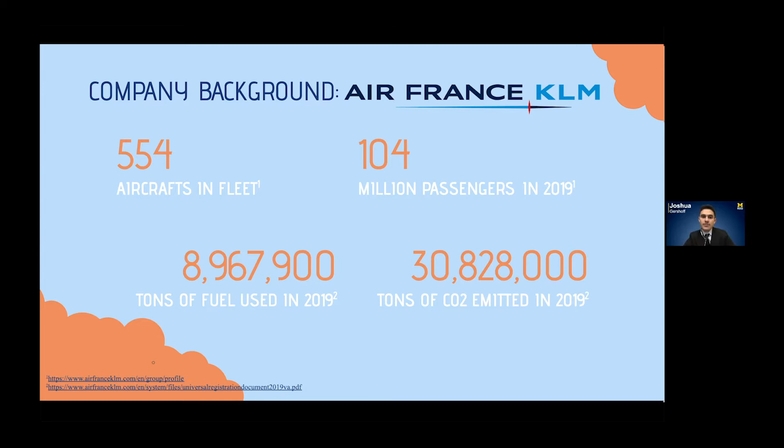With an industry-wide average fleet size of around 400, Air France-KLM is a moderately large airline with 554 aircraft in its fleet. They had 104 million passengers, used about 9 million tons of jet fuel, and emitted about 31 million tons of carbon dioxide in 2019.

Lufthansa, on the other hand, is a slightly larger airline with a fleet of 763 aircraft. They had 145.2 million passengers, used about 11.5 million tons of jet fuel, and emitted about 36 million tons of carbon dioxide in 2019.

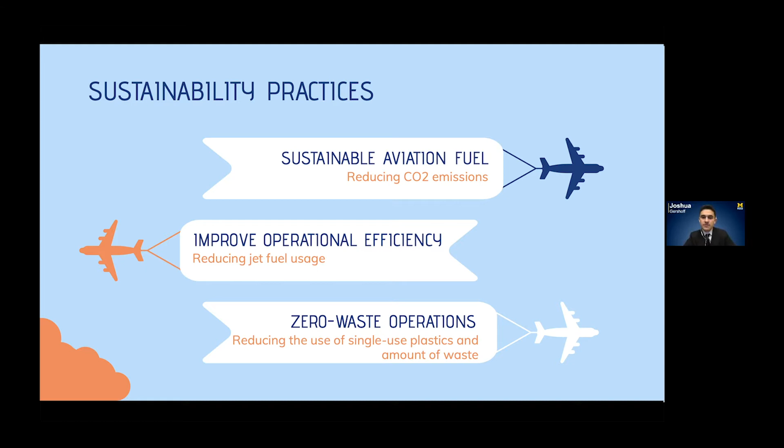Sustainable aviation fuel is an alternative jet fuel source and a substitute for fossil jet fuels. The fuel is made from sustainable resources like waste oils and non-fossil CO2, rather than being refined from petroleum. The overall benefit is that SAF can produce an 80% decrease in CO2 emissions.

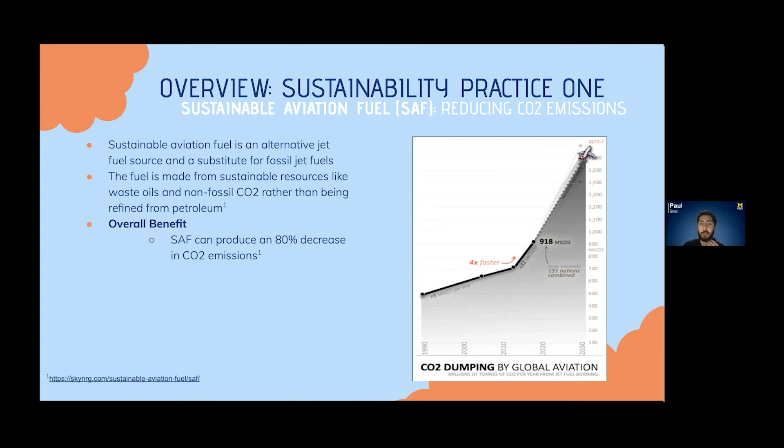As of this moment, Air France has been at the top when it comes to using SAF. According to Argus Media, they have been purchasing 120,000 liters of it annually. They have taken steps to partner with fuel companies to have access to SAF, and they have implemented a biofuel program to ensure they are not incurring all costs related to using SAF.

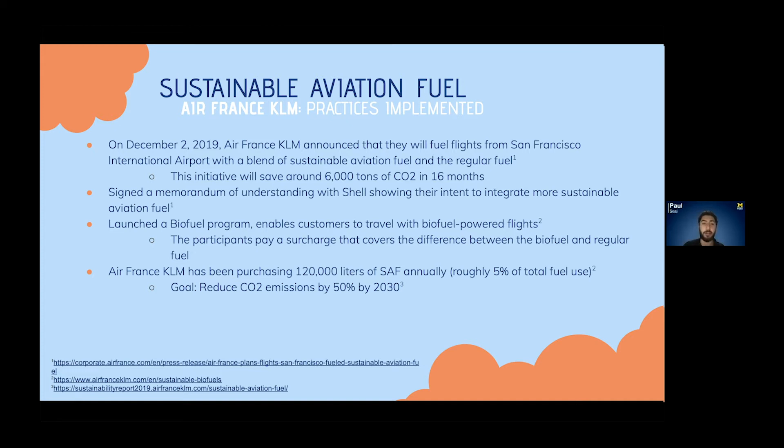When it comes down to being environmentally conscious, we believe it is important to be able to measure productivity. Air France has been transparent with their usage, partnerships, and estimated future usages, so from an investor standpoint, it will be easy to measure their effect on the environment. It also helps to ensure this is not a PR stunt.

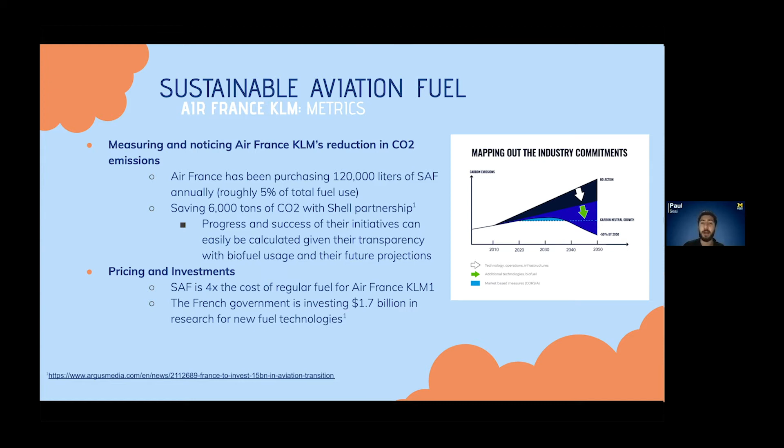The pricing aspect can prove to be detrimental if not implemented the right way. As of now, SAF is 4 times more expensive than regular fuel for Air France, according to Argus Media. On a positive note, the French government is investing $1.7 billion to SAF research.

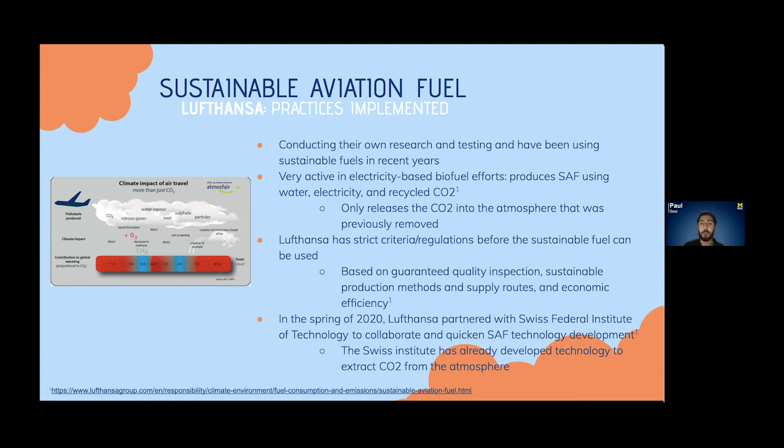Besides using traditional SAF, Lufthansa Group has been heavily involved in research and development for sustainable fuels. They are specifically involved in creating an electricity-based biofuel using water, electricity, and recycled CO2. This technology will not release any new CO2, it only releases what is extracted from the atmosphere, which allows for net zero emissions while using that fuel.

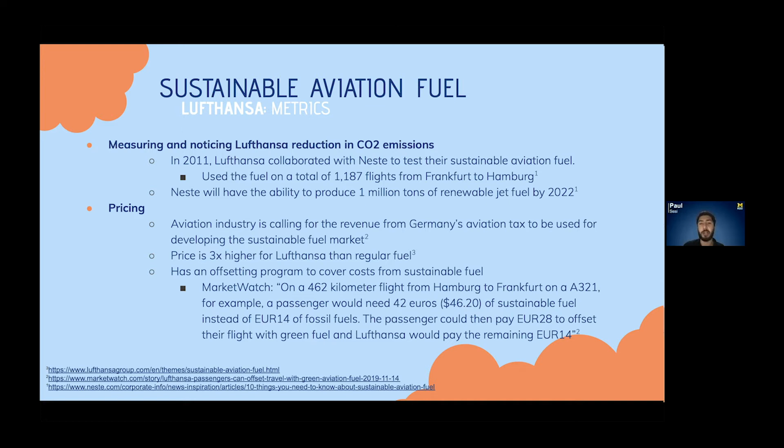Lufthansa has partnered with Neste, which gives them direct access to Neste's estimated 1 million tons of renewable fuel. They also have an offsetting program where customers pay around 50% of the surcharge for flights using SAF. When it comes to pricing, it is 3 times more expensive than regular jet fuel, but it is likely that the German government will use aviation money to cover the cost of the sustainable practice.

Now let's look at comparison. As of now, Air France is outperforming Lufthansa when it comes to usage. However, Lufthansa's research and development team is promising technology that would outperform Air France, given that the market is still extremely small. Lufthansa's partnership with Neste also has more potential than Air France with Shell because of their production capabilities.

When examining their cons, the cost of SAF is more expensive for Air France-KLM. For Lufthansa, their new technology is still a few years out, but Air France-KLM is able to use SAF now.

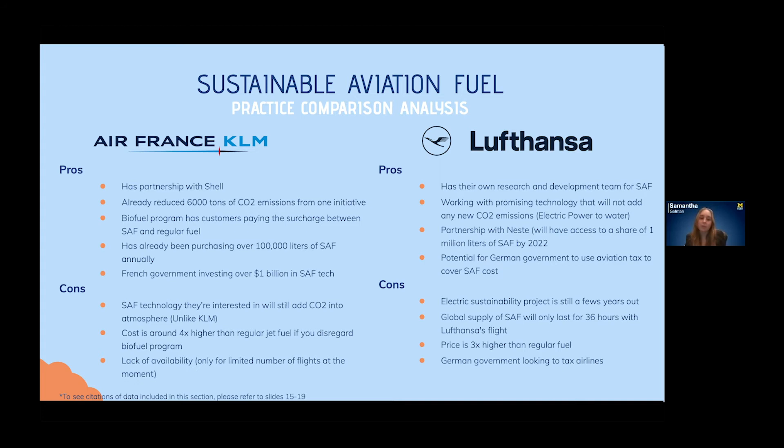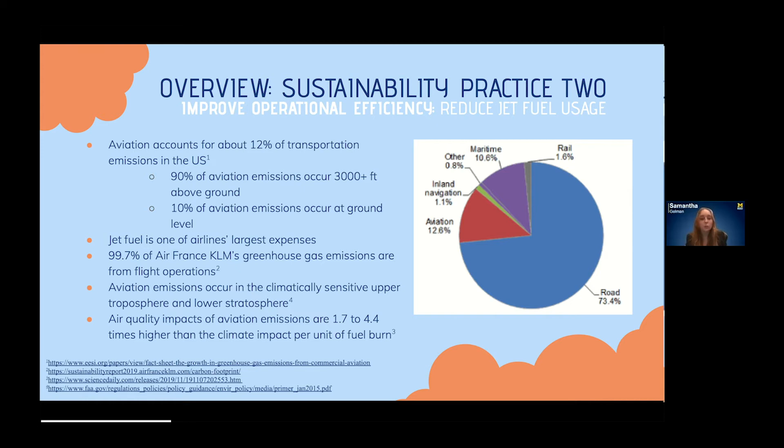The next sustainability practice we're examining is operational efficiency. Improving operational efficiency can reduce jet fuel consumption, thus reducing greenhouse gas emissions. As jet fuel is one of airlines' most significant costs, improving operational efficiency can also lower their expenses.

Air France-KLM has been implementing many new policies to increase operational efficiency and thus decrease jet fuel usage. For example, because lighter aircraft use less fuel, Air France-KLM has implemented weight reduction measures on board. To reduce the weight of the aircraft even further, they have also been reducing the extra fuel carried per flight.

Air France-KLM has also been trying to increase operational efficiency and sustainability by optimizing flight operations. They have recently begun using OptiClimb and OptiDirect in their aircraft, both aiming to reduce jet fuel consumption. Furthermore, Air France-KLM has made a conscious effort to modernize its fleet and replace older aircraft with more fuel-efficient models.

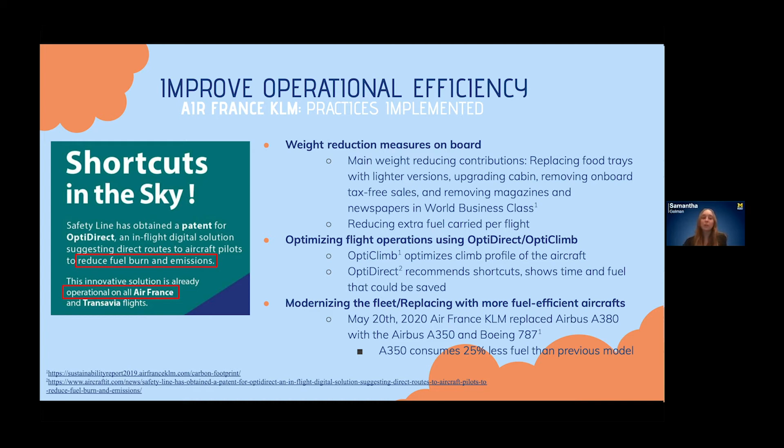On May 20th, 2020, Air France-KLM ended Airbus A380 operations and replaced it with the more fuel-efficient Airbus A350 and Boeing 787. Air France-KLM has been tracking the impact of their policies through tracking their jet fuel usage.

They made it a goal to reduce fuel usage by 4 million liters in 2019, and through these policies, Air France-KLM was able to exceed this goal and reduce total fuel consumption by 4.3 million liters.

In addition to tracking environmental impact, Air France-KLM tracked how these sustainability improvements impacted their expenses. According to their financial statements, despite the decreased jet fuel consumption, an increase in jet fuel price caused Air France-KLM profit to decrease by $320.3 million in 2019.

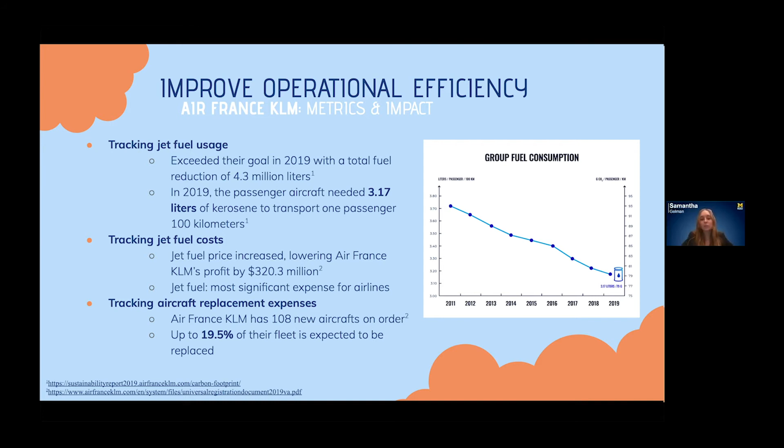According to Air France-KLM's universal registration document, they currently have 108 new, more fuel-efficient aircraft on order. From these new sustainability policies, in the future, Air France-KLM's expenses will decrease along with jet fuel consumption.

Lufthansa, on the other hand, partnered with both Google Cloud and Honeywell Aviaso, leaders in the software industry, to increase their fuel efficiency. They've also invested in a lot of new fuel-efficient aircraft. In 2019 alone, they got 27 new aircraft that emit 25% less emissions. Retiring their inefficient aircraft that these replace also helps a lot with increasing their fuel efficiency on average.

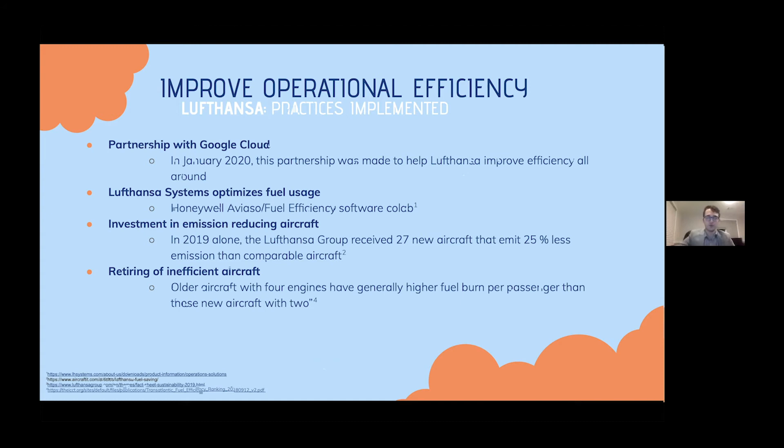So more statistics on Lufthansa: they have 198 new aircraft on order with delivery dates up to 2027. With a current fleet of 763, this represents 30% of their entire fleet.

In terms of their fuel consumption efficiency, in 2019 their efficiency was 3.67 liters of kerosene to transport one passenger over a distance of 100 kilometers. They've increased this fuel efficiency by 30% since 1994 and have proven to take a lot of care on this matter.

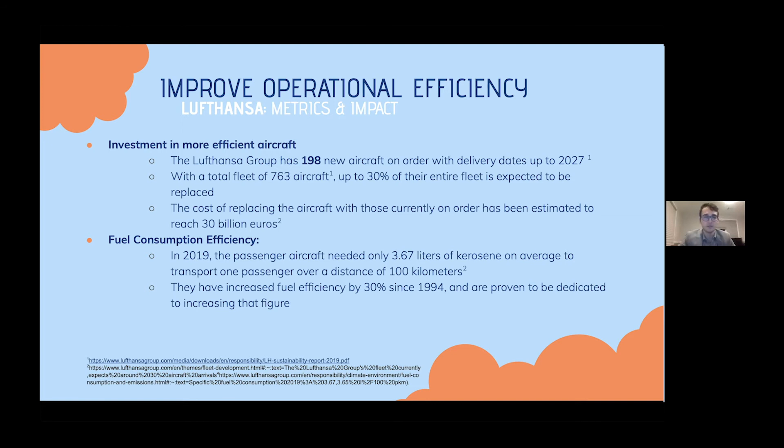Now, if you look at the graph on the left, this was a calculated average in 2017 of airlines' fuel efficiency. The graph on the right shows that 80% of the key metrics behind this fuel efficiency rating come from seating density and aircraft fuel burn rate. These have both increased significantly in modern aircraft, reducing operating costs and creating additional synergies.

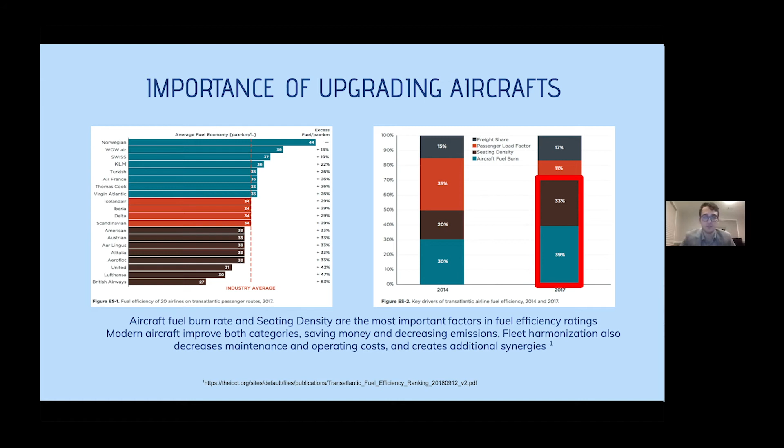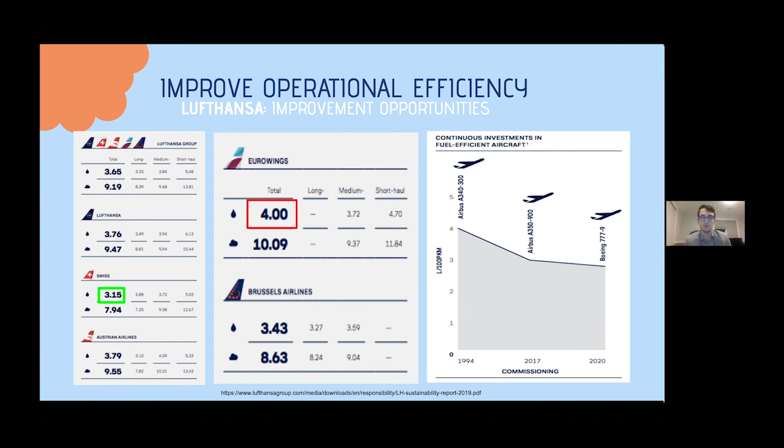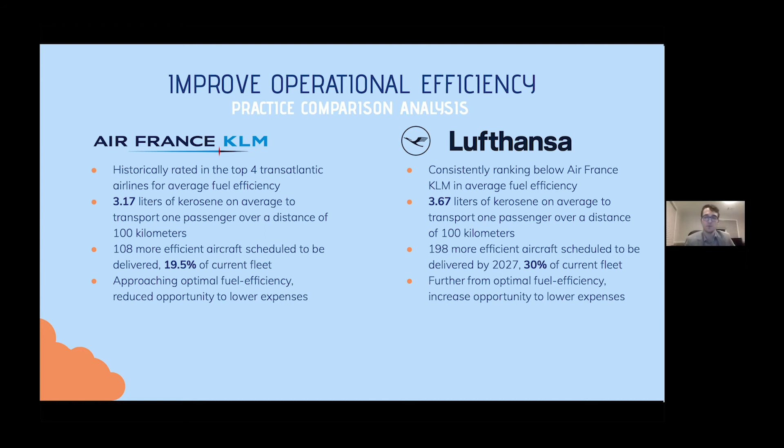When it comes to comparing the two, Air France-KLM has been historically rated in the top 4 with 3.17 liters of kerosene on average. However, Lufthansa has 198 more efficient aircraft scheduled to be delivered, representing 30% of their current fleet, as opposed to Air France-KLM's 19.5%. This means there's a lot more room for Lufthansa to expand and lower their expenses.

Next I'm going to talk about the third and final sustainability practice, which is the reduction of single-use plastics in order to create a zero-waste environment on board.

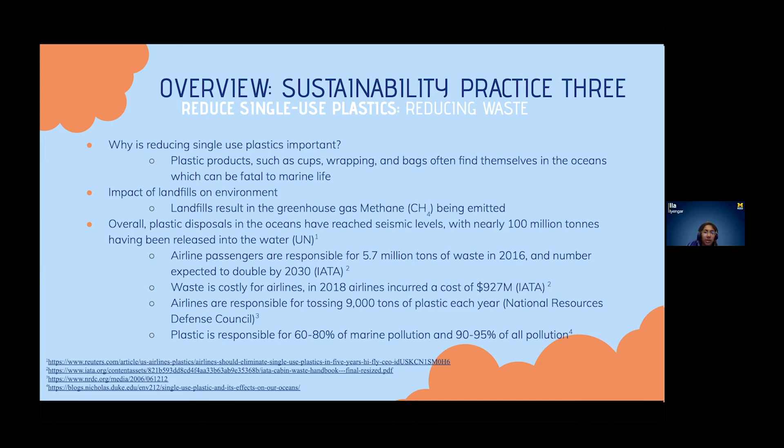Single-use plastic products are often discarded incorrectly and end up in landfills or the oceans. Landfills create methane, which is a key contributor to global climate change. According to the IATA, passengers alone accounted for 5.7 million tons of waste in 2016, with expectations that number doubles by 2030. Again, this is an issue because plastic causes 90 to 95% of all pollution in general. All of this waste costs the airline industry $927 million as well.

KLM uses 4 sustainability practices in their operations: reducing, reusing, recycling, and redesigning. They use in-company recycling, a practice that allows the company to both save money and recycle materials in-house. This practice overall has reduced waste by 9%, and their goal is to decrease that volume of waste by 50% by 2030.

This ties into the redesign process, as these recycled materials are turned into trays, utensils, and even plane repair parts for the airline, saving not only on material costs but also on environmental impact. Reduction of material required means that when plastic is needed, less of it will be used. An example of this would be the redesigning of plastic cups to use less material, again cutting costs and helping the environment.

This also saves money in the long term. KLM considers the fact that some reusable materials are heavier than plastic, and they opt to recycle or redesign where plastic cannot be eliminated.

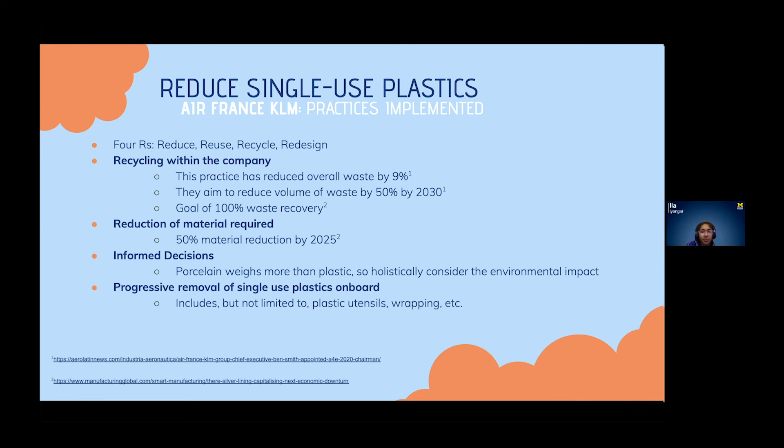The metrics we used were tons of plastic thrown away and recycled, number of reusable items incorporated into flights per year, and amount of fuel consumption. Instead of considering these metrics as a static number, we decided to analyze them more dynamically as an increase or decrease per year in order to show an overall trend.

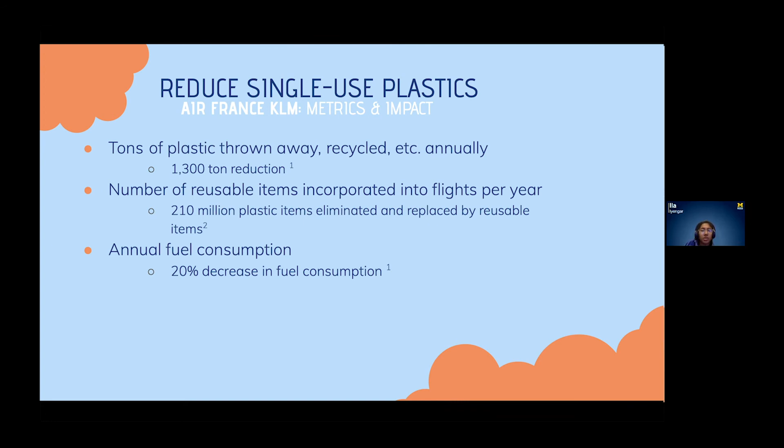KLM has eliminated 210 million plastic items per year, including cutlery items and stirring sticks on board. There has been a 1,300 ton reduction in plastic per year, and fuel consumption has reduced by 20% in the past year as well. Rather than providing all business class customers with a blanket wrapped in plastic, they replaced the plastic with a paper wrap.

Continuing with their in-flight service, Lufthansa also replaced their plastic cups with recycled plastic, avoiding the issue of plastic waste as they use recycled materials.

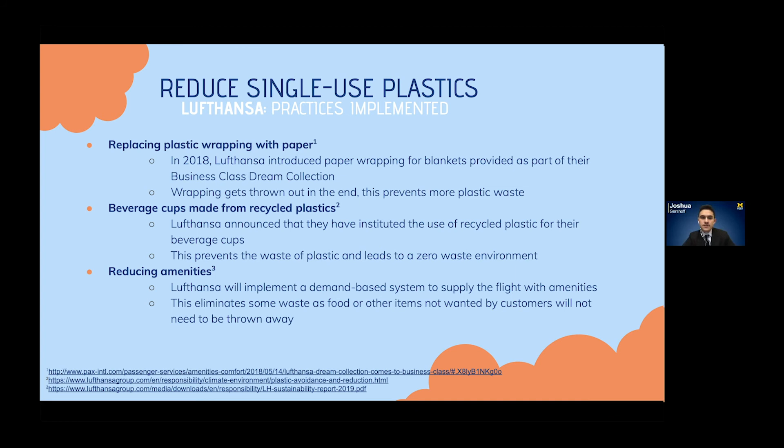Going further, Lufthansa also realized that a lot of amenities they provide go unused. To avoid this, Lufthansa has instituted a demand-driven system to supply the cabin with in-flight services so that they do not need to waste as much plastic.

Lufthansa has reported that they are responsible for saving 6 tons of plastic waste in 2019 via their recycled water bottles. When including common plastic goods such as cups and cutlery, their estimates show that they have replaced over 400 million plastic products with reusable materials.

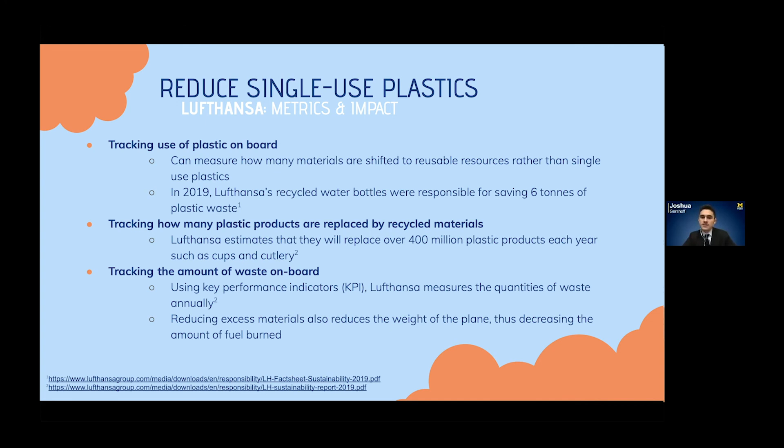Lastly, Lufthansa also utilizes several key performance indicators in order to track energy consumption and waste annually, and they use this information to alter their onboard practices. Thus, they reduce the weight of their flights, which lowers the amount of jet fuel burned and lowers the cost of each flight.

Both Lufthansa and Air France KLM have increased their use of recycled materials in order to be more environmentally friendly and to cut costs.

However, it appears that Air France KLM has gone deeper. They instituted a holistic review to their plastic usage, which enabled them to cut other heavy materials in order to become more cost efficient.

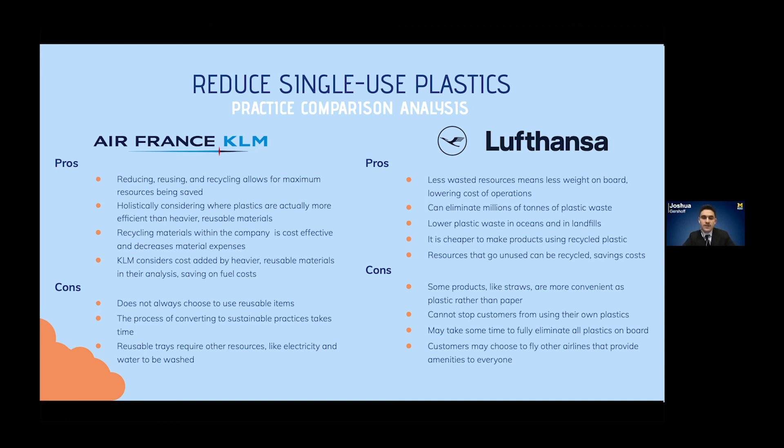In terms of the cons, both companies acknowledge that this change is far from immediate and may take time to see positive change. Additionally, both Lufthansa and Air France KLM recognize that it may be more convenient to utilize single-use plastics. It appears that Air France KLM seems to go deeper than Lufthansa with their research and has the advantage here.

Now moving on to the finances of both companies. Currently, the PE ratio for Lufthansa is 3.5 and for KLM is 8.02, showing that KLM is more overvalued than Lufthansa, making the latter a better investment.

Furthermore, looking at the EV over EBITDA, we can see that Lufthansa is the clear winner here as well, with a ratio of negative 7.1 as opposed to KLM's negative 5.1.

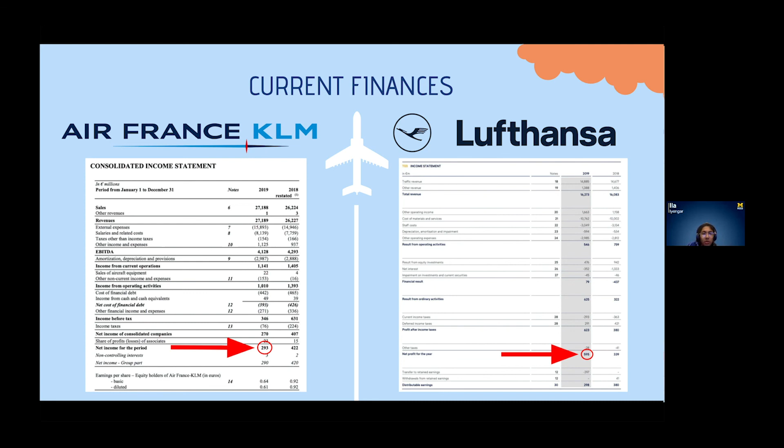The sales volume of Lufthansa is also higher than that of KLM's, meaning higher gross profit and net income, which shows that Lufthansa is a larger and more successful airline. All in all, financial ratios as well as pure income and sales point to Lufthansa as being the better investment.

And this brings us to a final recommendation. Based on our research, we suggest an investment in Lufthansa.

We took a look at how each company has implemented the 3 identified practices while analyzing the finances and progress behind them. Although some data included in this presentation may show that Air France KLM is currently more sustainable in terms of SAF and single-use plastics, we feel that it is equally as, if not more, important to look ahead when you're making a long-term investment.

The sustainability market is very undeveloped and Air France is ahead in some cases at the moment. However, Lufthansa has a greater opportunity to increase sustainability and decrease expenses from their innovative initiatives, research, and developments. They're likely to surpass their airline competitors' sustainability impact while increasing profits within the next 3 to 5 years.

To specify, Lufthansa's variations in fuel efficiency across their subsidiaries provide a large opportunity for them to bridge the efficiency gap. Their substantial investment in updating their fleet to more efficient aircraft has the potential to improve overall efficiency and decrease related costs at a much higher rate than Air France KLM.

Looking forward, Lufthansa's research and development suggest their technology and advancements will put them ahead as a sustainable and profitable airline.